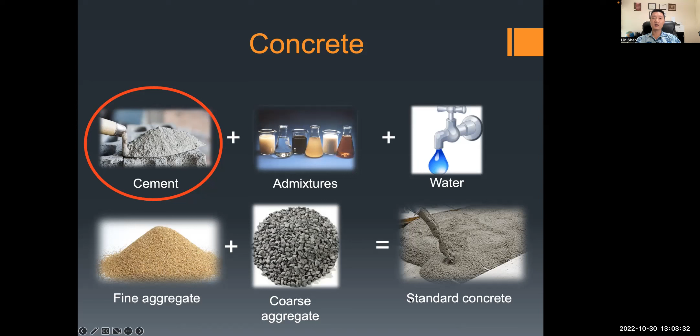6 to 8% of all man-made CO2 comes from cement production. Annual cement production is 4.6 billion tons, and for every ton of cement, you produce 0.85 tons of CO2. So annual CO2 from cement production is around 4 billion tons, which is equal to annual CO2 emitted by around 600 million cars.

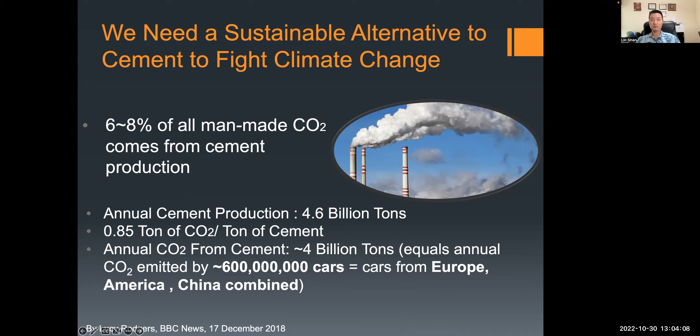In April last year, Hawaii became the first US state to declare a climate emergency. The resolution calls on government to make choices that will enable a more sustainable future. It goes as far as to ask for a ban on public and private investment that would make climate change worse.

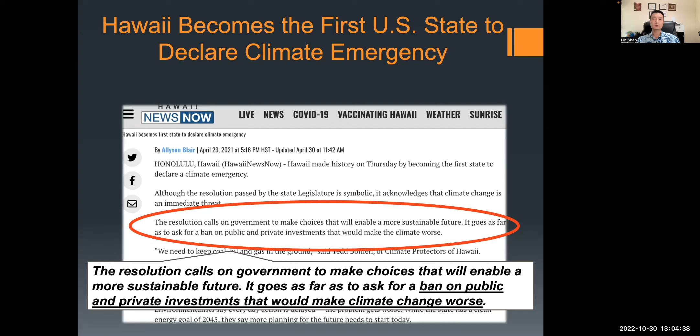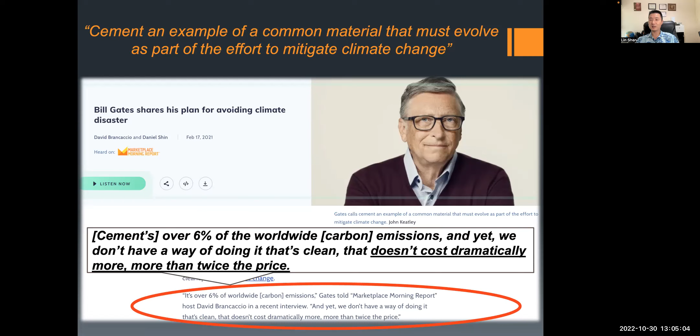This is an interview of Mr. Bill Gates last year, and I'll just quote here: cement is over 6% of worldwide carbon emissions, and yet we do not have a way of doing that is clean, that does not cost dramatically more than twice the price. I believe in many cases we can do that, sometimes even much better than that, as I will show you in a moment.

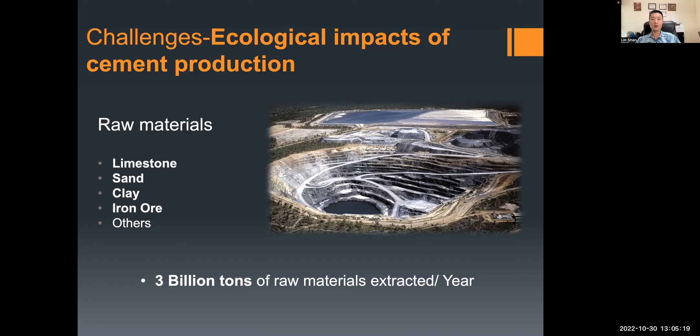Cement production extracts around 3 billion tons of raw materials, including limestone, sand, clay, and so on, every year from the earth.

At the same time, industrial waste from the coal burning process and steel and aluminum production produces hundreds of millions of tons of fly ash, slag, and red mud every year.

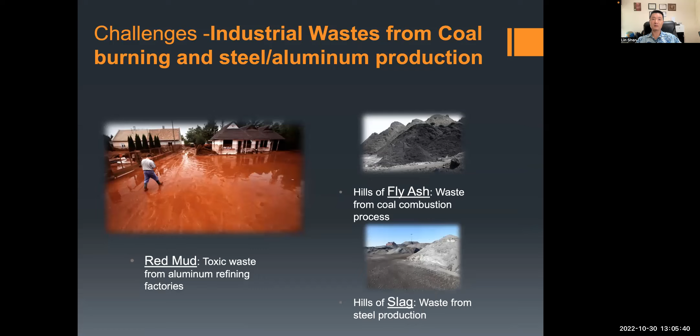This is a video I took while visiting one of the largest aluminum producers in the world, Xinfa Group, in Shandong province, China. You can see the polluted river from the red mud.

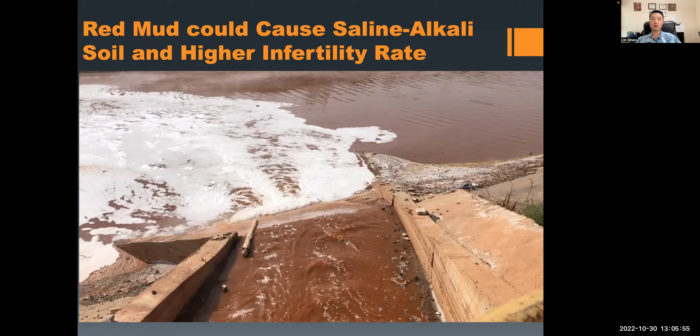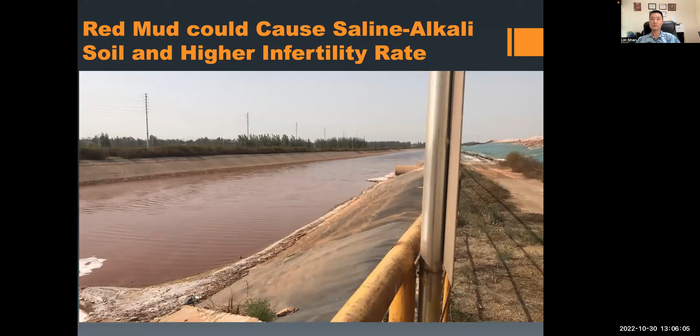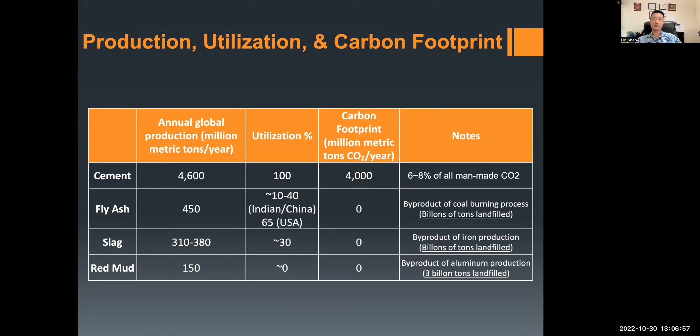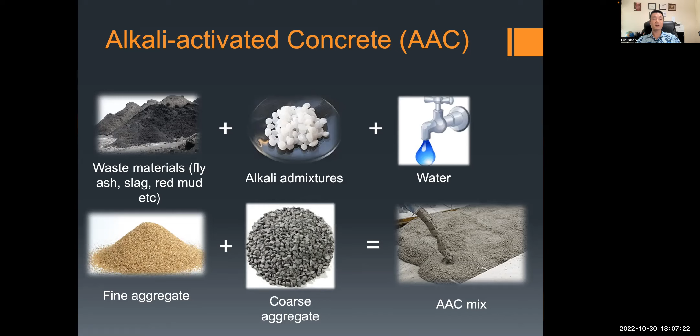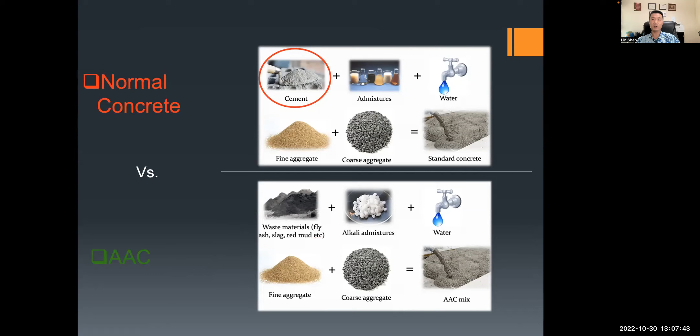So AAC, or alkali-activated concrete, uses waste materials such as fly ash, slag, and red mud, plus a small amount of admixtures (we call those alkali-activated admixtures), plus water, sand, and coarse aggregate mixed together, and we have concrete. Comparing normal concrete and AAC, we can see both use water, sand, and coarse aggregate, and both need a small amount of admixtures. The major difference is AAC uses waste materials instead of Portland cement.

So when we replace Portland cement with fly ash, slag, or red mud, we help reduce the billions of tons of CO2 from cement production. We also help reduce the billions of tons of excavation of raw materials such as limestone and clay. We also help reduce the billions of tons of fly ash, red mud, and slag already landfilled. So we could have cleaner air, water, and soil.

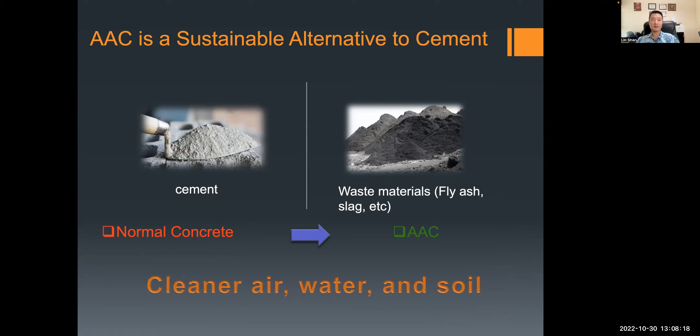Alkali activation is a reaction of solid aluminosilicates, which we call precursors, such as fly ash and slag, under alkali conditions, using alkali activators such as sodium hydroxide and sodium silicate. Mixed together, we can produce a hardened binder.

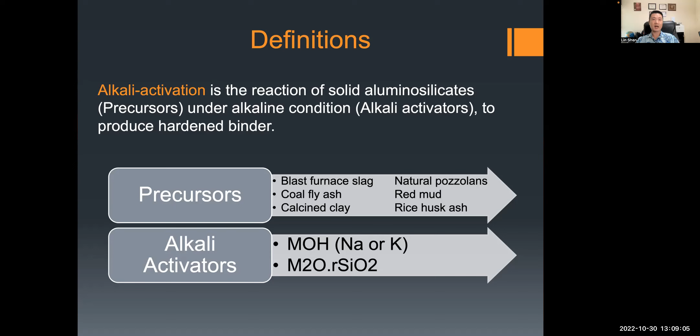AAC is not a new concept. It dates back more than a century.

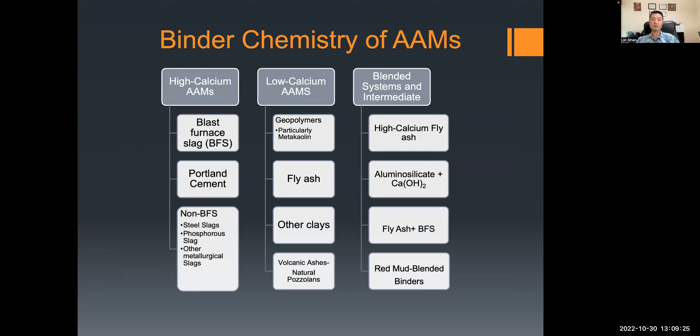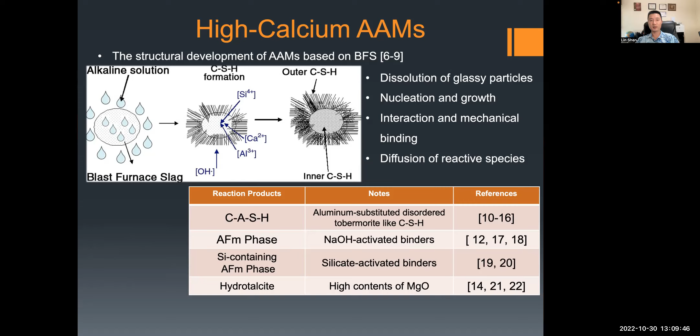Based on the chemistry of precursors, we have high-calcium AC, low-calcium AC, and blended systems. For high-calcium AC, the reaction products include C-A-S-H, or aluminum-substituted, disordered tobermorite-like CSH. We could have AFm, which is a classic phase in Portland cement, among other hydration products.

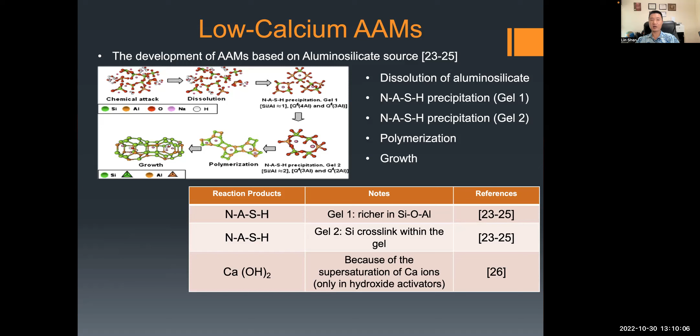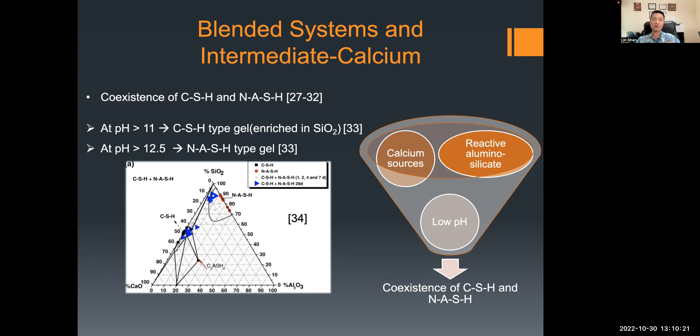For blended systems with intermediate calcium, we could have coexistence of CSH and N-A-S-H. Also, depending on the pH level, we could have different types of reaction products.

The ultimate goal of this research is large-scale applications of high-performance and economic AAC using standard equipment and a simple mixing procedure. We try to optimize the concrete mix design, balancing performance and cost, by studying these precursors more accurately and by monitoring the kinetic reaction using Raman spectroscopy.

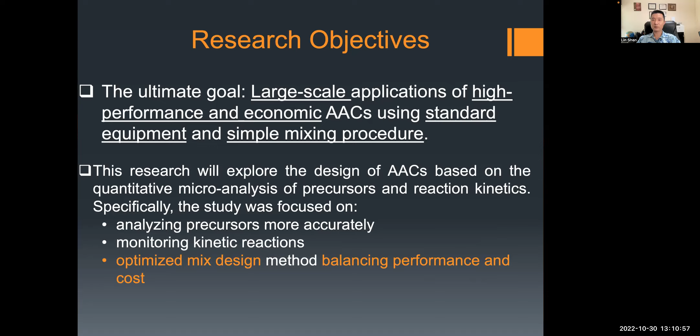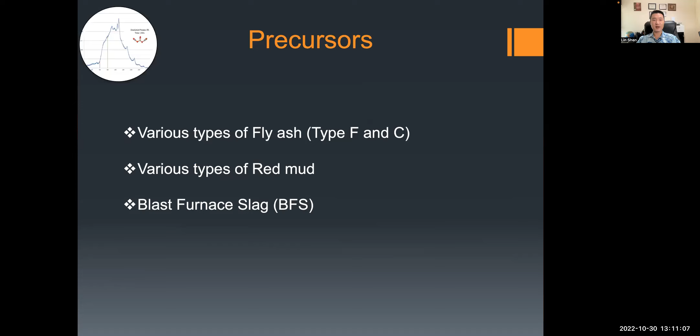Next, I will show you the precursor analysis. We use fly ash, different types of red mud, and slag.

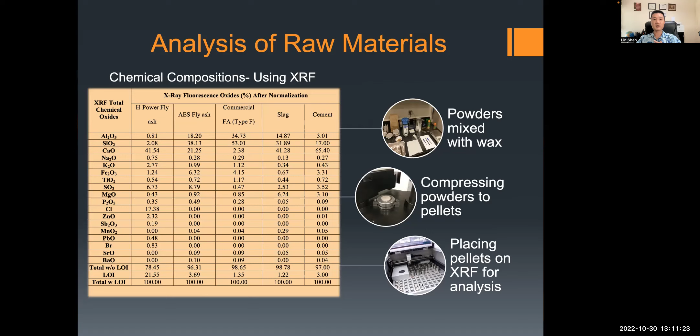Here shows XRF, which can give us the basic information of percentage of different types of oxide. However, XRF alone is not enough.

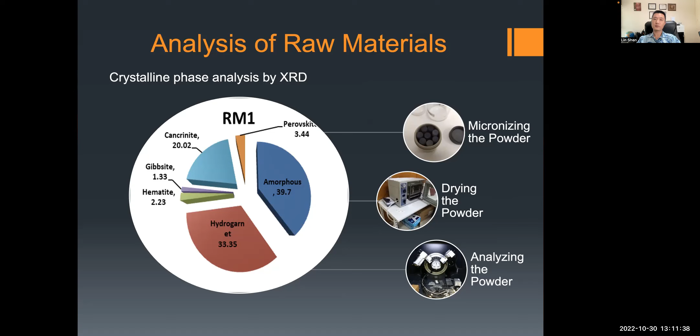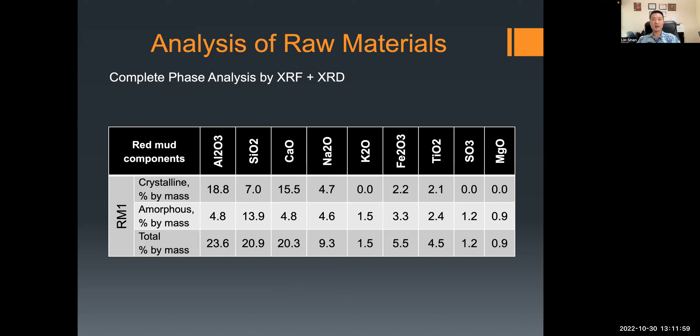We also use XRD, X-ray diffraction, to give us the idea of the percentage and type of crystalline phases. By combining XRD and XRF, we could have a much better estimation of the reactive phase and also the non-reactive phase, also called amorphous phase versus crystalline phase, as well as the type and strength of the crystalline phases.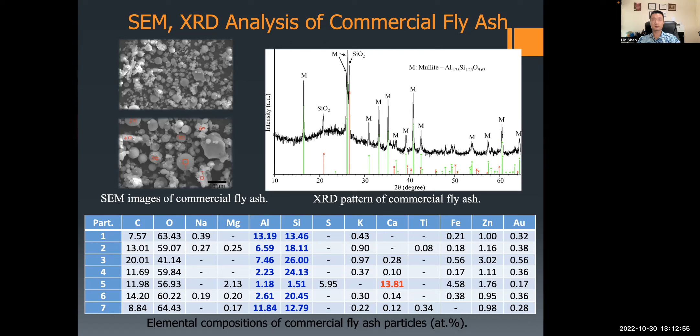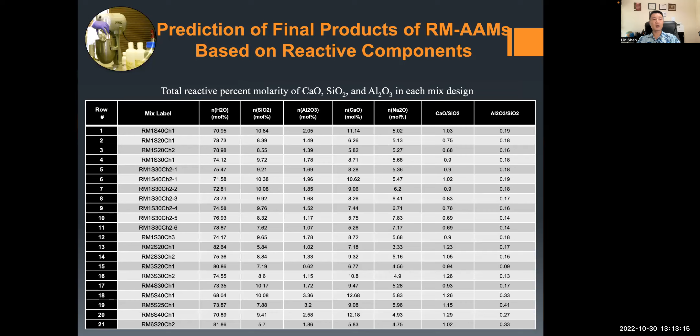And here shows the major reactive phases of different types of raw material samples, including reactive calcium oxide, silica, and alumina. Based on that, we can predict the final hydration product of the geopolymer concrete based on these components, with the help of this ternary diagram showing us the percentage of reactive calcium, silica, and alumina.

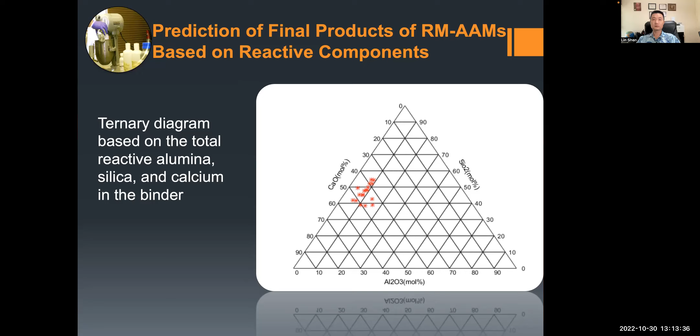The predicted final product will also be verified by XRD. In this example, we show the XRD of raw material and geopolymer concrete at 1 day, 7 days, and 28 days. By comparing these 4 peaks, we see mostly the hydration product is CSH.

We could also have some small amount of NASH. So this raw material generates CSH mostly, as we can see from the peak here, a big change in CSH.

Its crystalline phase is hydrogarnet. Hydrogarnet is not reactive. However, it is very strong, so it can serve as a filler and provide enough strength for concrete. Actually, geopolymer concrete can easily achieve strength more than 100 megapascal.

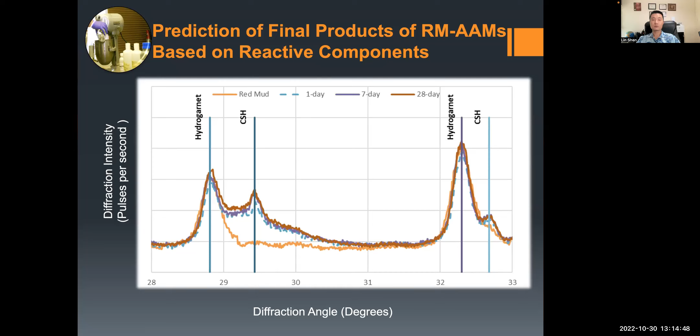Next, I will show how we can monitor the kinetic reaction of alkali activation using Raman spectroscopy. We can use Raman to do many things. For example, we can determine the phases of alumina, silica, and so on. We can analyze alkali activation at room temperature and also detect impurities such as calcite.

But the most interesting thing is we can monitor the chemical reaction. We call that the dissolution process, using Raman spectroscopy. And here shows a picture of samples for Raman.

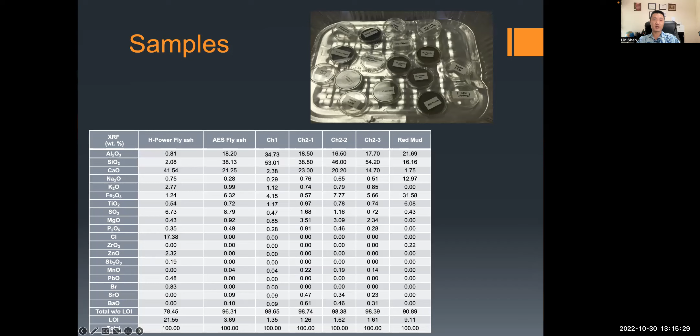What is Raman spectroscopy? Raman is a light scattering technique that can provide us detailed information such as chemical structures, phases, polymorphism, crystallinity, and also molecular interactions.

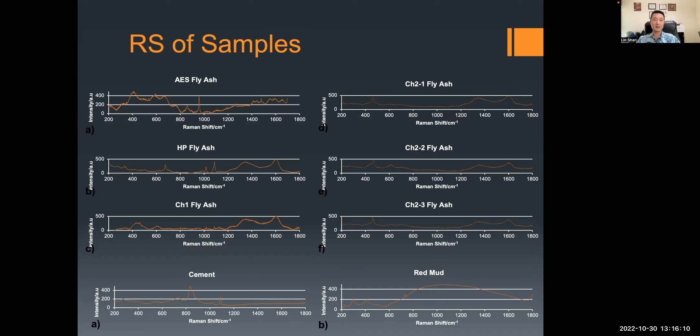Here shows some examples of Raman spectra of different types of samples, including AES fly ash, raw material, and so on. We also use MATLAB codes to quickly detect and quantify the crystal phase and also amorphous bandwidth.

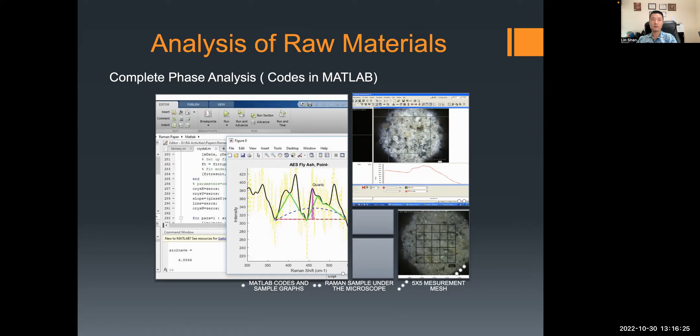And here shows complete phase analysis of commercial fly ash. We can see different types of phases using Raman.

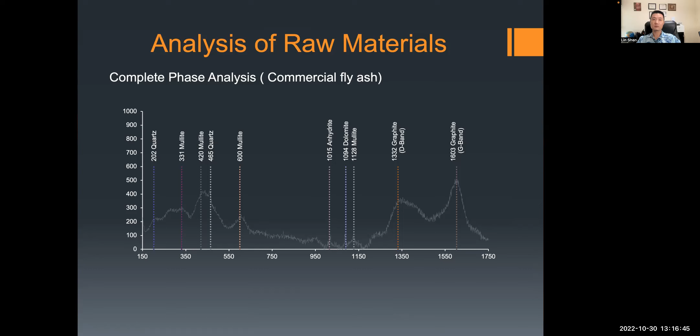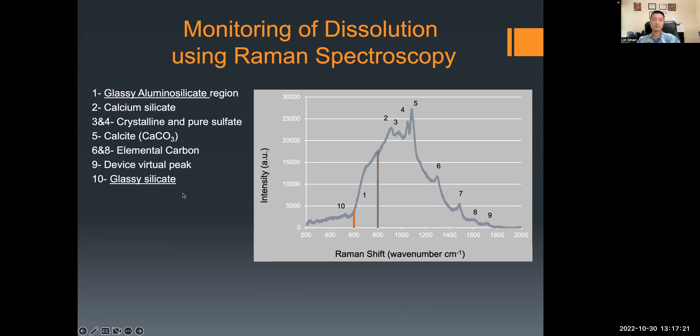This video shows dissolution of fly ash in sodium hydroxide solution for the first 24 hours. The dissolution speed changes over time, and sometimes even reverses its direction in certain phases. So you can see it going down, sometimes even going up.

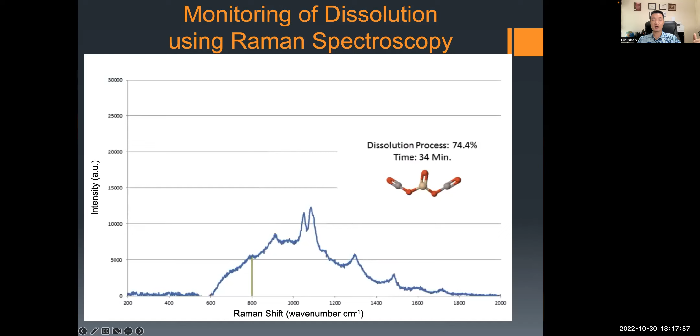We have geopolymer forming. However, in this case, we have some excess sodium hydroxide which further dissolves the geopolymer. So the concentration of ions actually increases again.

By doing this, we can get information such as the suitability of precursors. It can also help us optimize the concentration and amount of activators. It can also help us optimize the mixing time and mixing procedure, so we can reduce the cost and optimize the performance.

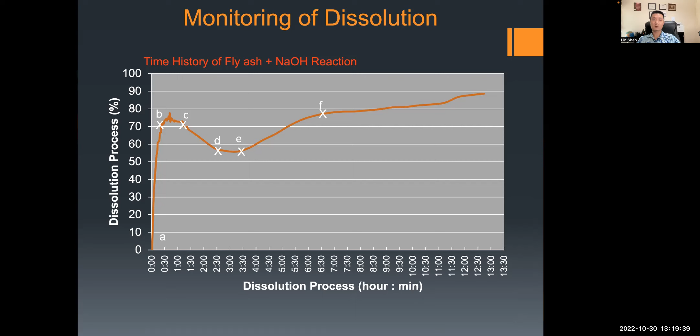We can also use Raman to detect the final hydration product of AAMs. In this case, we have NASH, CASH, and also aluminum silicate bonds.

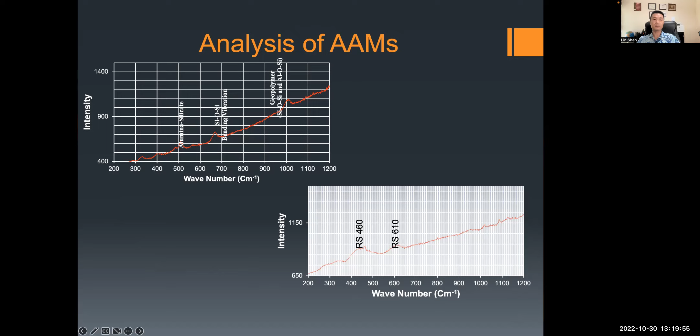Next, I will quickly go over the performance evaluation in the lab before we talk about field applications. You will see the lab results pretty much in line, consistent with other research.

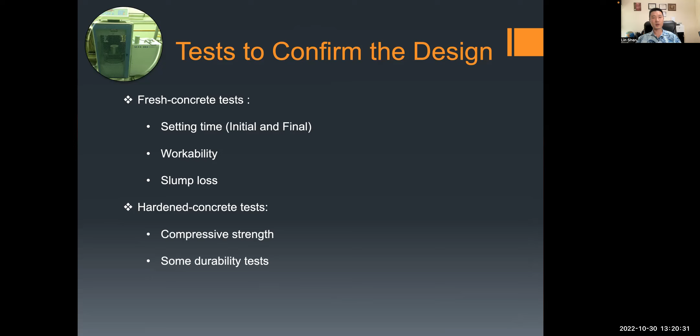We did fresh concrete tests, including setting time, workability, slump loss, and hardened concrete tests, including strength and other durability performance. This is the test for slump.

Compressive strength: AEC is very easy to achieve high strength. So the hard part is how we can satisfy all the fresh and hardened properties, as well as durability, safety, and cost.

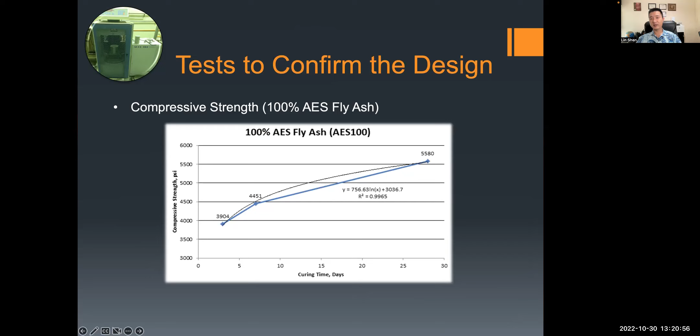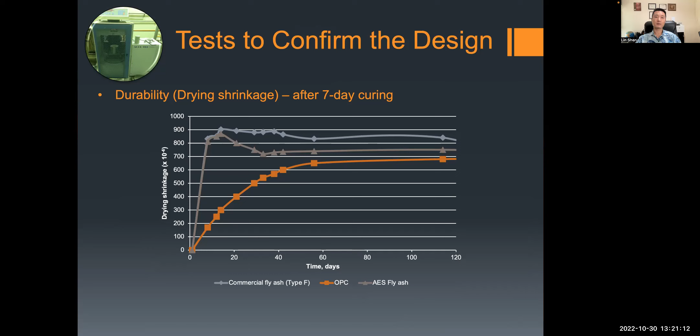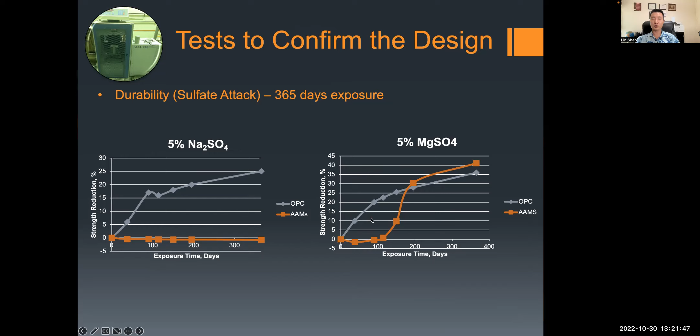Here shows the result of sulfate attack, one of the potential chemical attacks for concrete. We can see AAC is pretty much immune, very high performance to resist sodium sulfate. For magnesium sulfate, the performance is similar to OPC, because magnesium sulfate can attack CSH, and we have CSH in both OPC and AAC.

Here shows the result for ASR, alkali-silica reaction, another potential chemical attack for concrete. We can see ASR potential is greatly reduced for AAC, which is again pretty consistent with other findings.

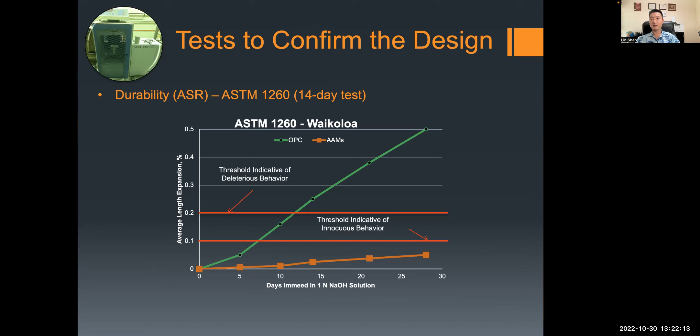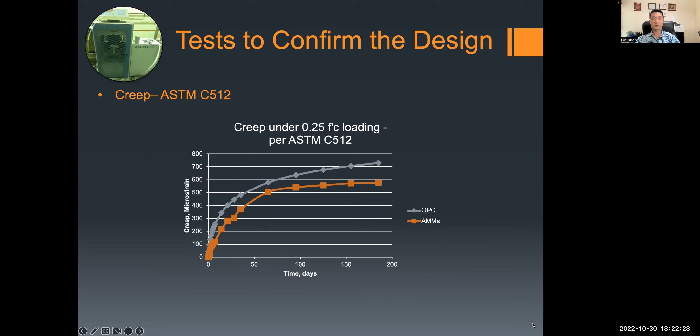Here shows the creep result. Creep is similar to normal concrete. This is a setup of a creep test.

Lastly, let us focus on field applications in both Hawaii and China. This table shows a case study of fly ash-based AAC, showing the carbon footprint of alkali-activated concrete.

The second column shows ordinary Portland cement concrete. We can see more than 85% reduction in carbon footprint. Cost-wise, in this case we have 26% cost reduction; in some cases it may go up to more than 50% reduction in cost. It does not use any cement, so 100% cement reduction.

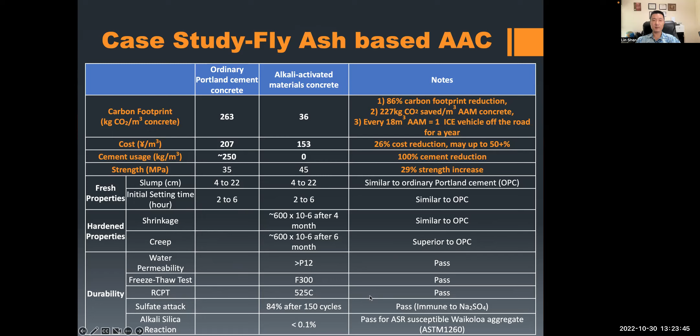Strength-wise, very good, about 30% strength increase. Fresh properties such as slump and setting time are pretty much comparable to normal concrete. Shrinkage and creep are similar, and durability tests are all pretty similar, sometimes even better than normal concrete.

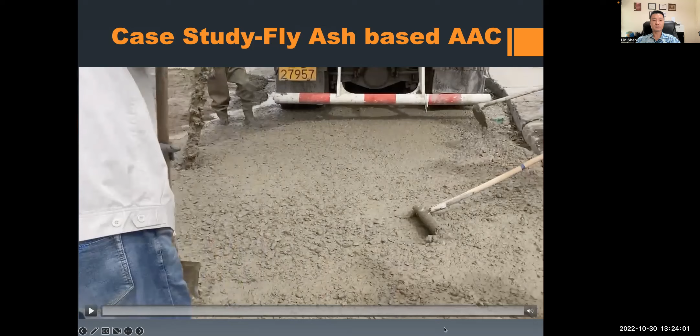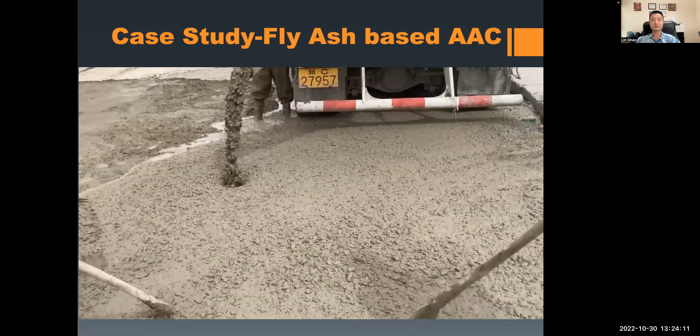Here shows the video of pouring the AAC. This is in one of the provinces in China. Here's another video.

Early next year, two types of AAC will be poured for the Farrington Highway widening project, one of the projects from Hawaii Department of Transportation, in the first part of 2023.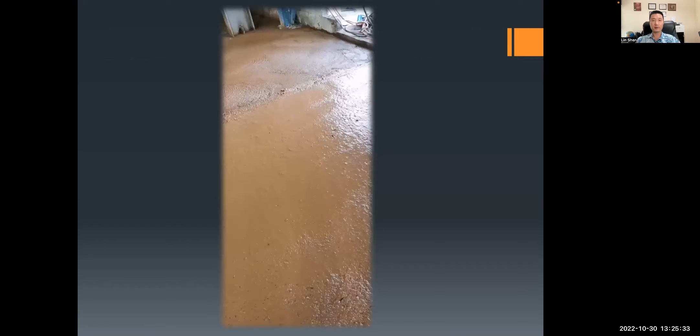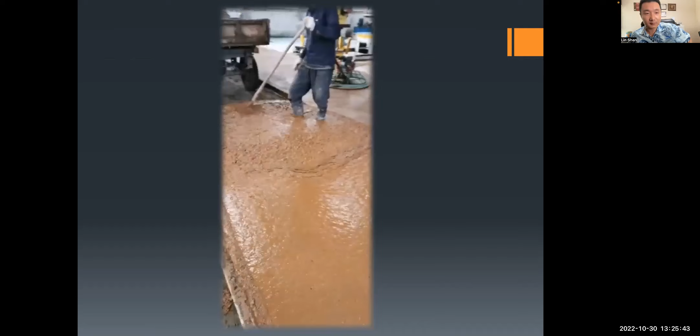Red mud is a high alkali and toxic material, which could cause very serious groundwater and soil contamination.

In the city I visited in Shandong province in China, red mud generated saline alkali soil, and basically no plant could grow around there.

Here shows a preliminary leaching test to confirm the safety of different types of AAC. It shows concrete made by H-power ash, which is a low quality ash from Hawaii, red mud from China, and also AES fly ash also from Hawaii.

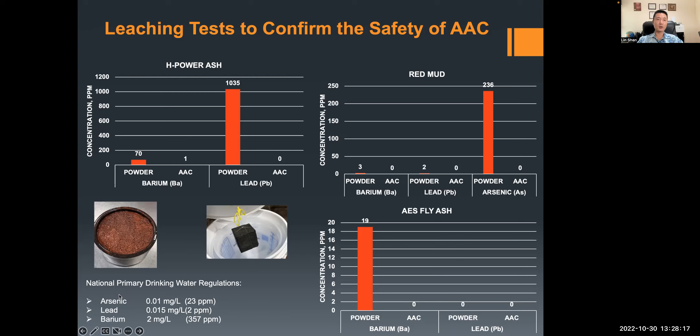In conclusion, we have some innovative approaches to analyze precursors for AAC. We also monitor the dissolution process using Raman spectroscopy, which could greatly help us optimize the concrete mix proportions and the mixing procedure for AAC.

The field application of optimized AAC could achieve cement-free concrete with more than 80% reduction in carbon footprint, around 25 to 50% reduction in cost.

The concrete can be cured at room temperature with well-controlled setting time, flowability, and other fresh properties. It has similar or even better hardened properties, durability, and safety. In many cases, we think it is mass production ready.